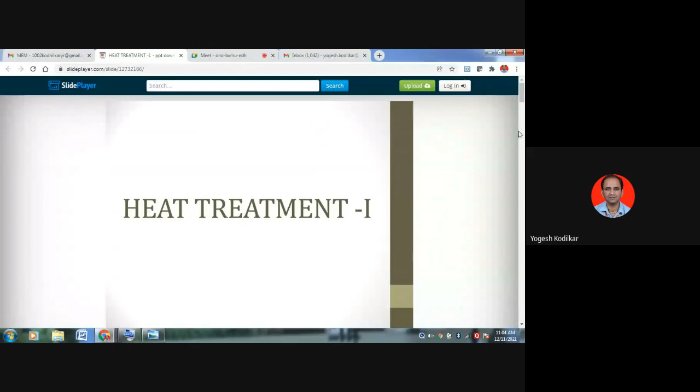Okay, let's briefly see what heat treatment means now. Basically, what does heat treatment do? We are giving heating combined with cooling. So let's see the heat treatment definition first.

Basically it is a 14 marks chapter. In this heat treatment process, we have to study various processes right from the initial ones like annealing, normalizing, then hardening, then tempering, mild tempering, types of tempering.

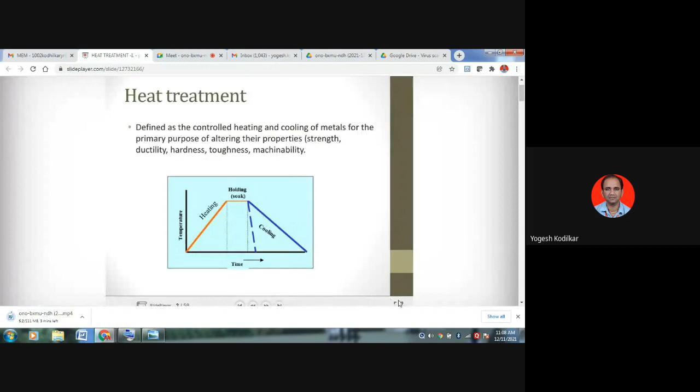So I hope you understood what heat treatment is, students. Heat treatment is basically heating above its recrystallization temperature. After heating, then soaking for a certain time period, holding, and after soaking or holding, then cooling. Cooling means quenching. So in this way, heat treatment is a combination of operations, not just one.

So, roadside blacksmiths used controlled heating and cooling of metal for the primary purpose of altering their properties. What is the primary purpose? To alter its properties - to change it, to enhance it.

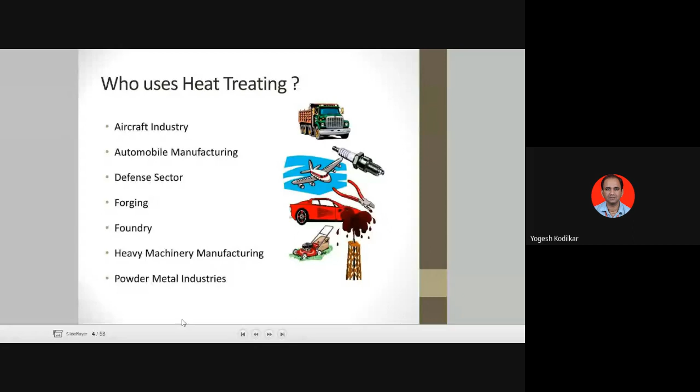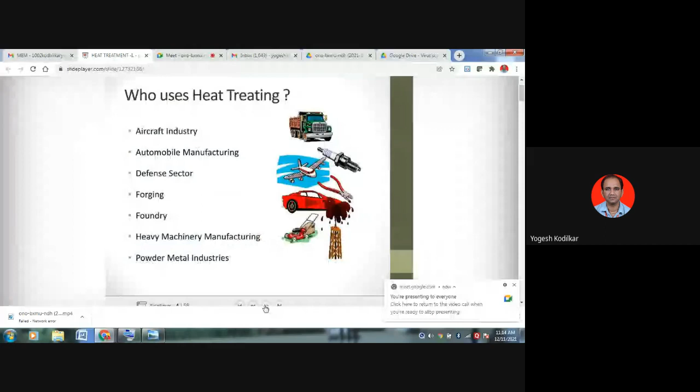In this way, these are the industries: the aircraft industry, automobile industry, defense sector, forging, foundry, heavy machinery manufacturing and powder metal industry use these heat treatment processes. We will move to the next part. So steps in heat treatment operations. What are the steps? These are the different steps in heat treatment operations.

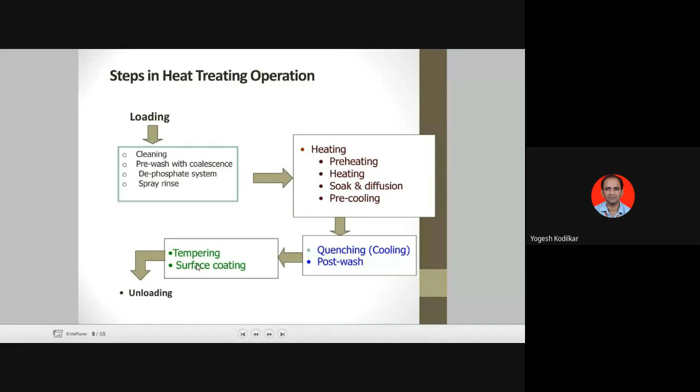So in this way these are the steps: loading, heating, cooling that is quenching, and last is reheating that is tempering. Then we move to the next part. These are the basic steps of heat treatment. There are three basic steps: heating to a specific temperature, then soaking, holding at the temperature for appropriate time depending upon the cross section and depending upon the type of process which you are involved in.

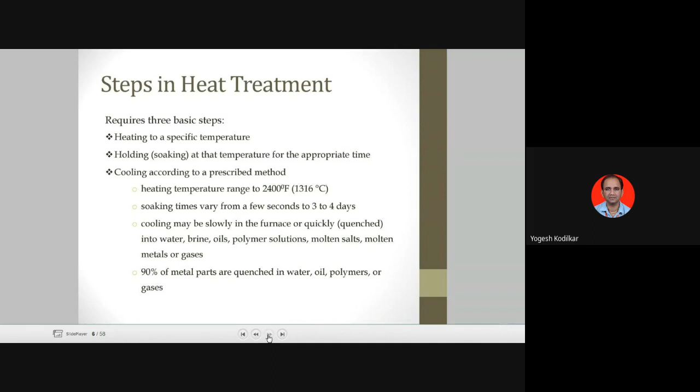Cooling, or either polymer or gas cooling also. So these are the different steps of treatment: heating, soaking, and cooling. So these are the basic three steps of heat treatment processes. Then heat treating processes: annealing, normalizing, hardening, and tempering. So these are the various heat treatment processes we have to learn.

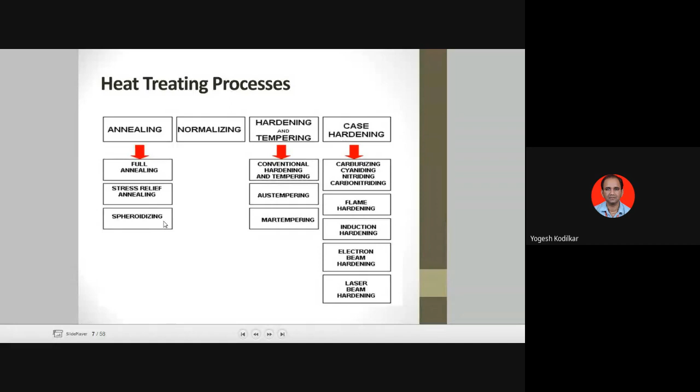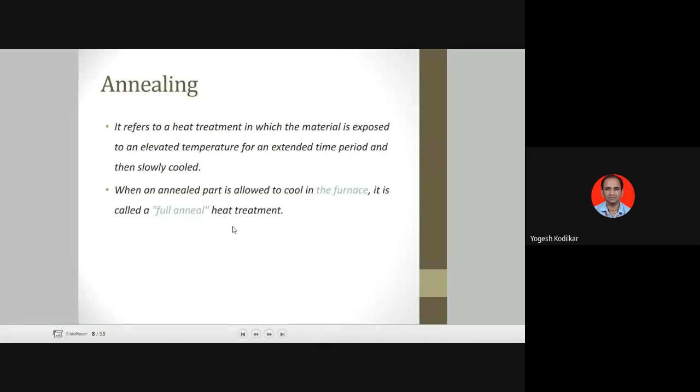It refers to a heat treatment in which the material is exposed to an elevated temperature for an extended time period and then slowly cooled. When an annealed part is cooled in the furnace, it is called full annealing. The furnace is switched off and it cools in the furnace only, that is full annealing. These are the types: full annealing, process annealing, stress relief annealing, recrystallization annealing, spheroidized annealing.

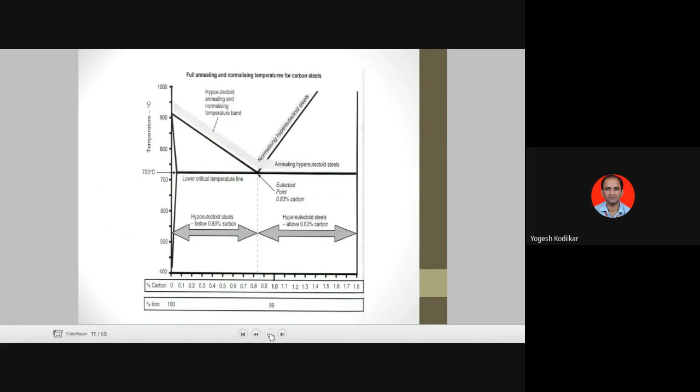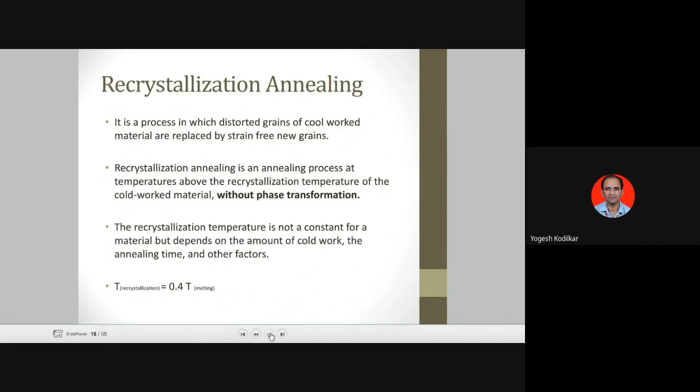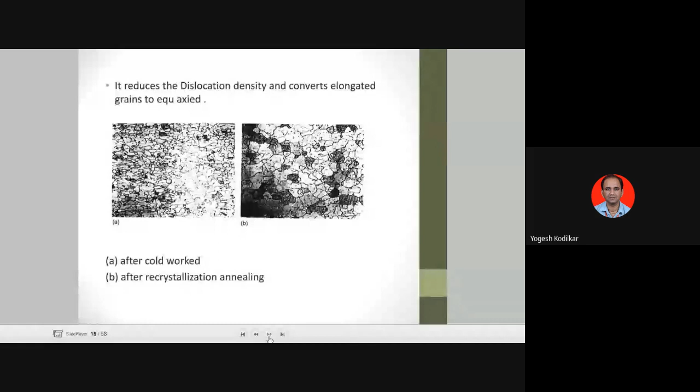In each annealing treatment there are different temperatures and different heating and cooling rates. So naturally it shows different microstructures during different types of annealing. So these are the different annealing treatment processes. And in spheroidizing, a spherical cementite structure is formed. That's what is called spheroidizing. So these are the various treatment processes which you have to learn one by one.

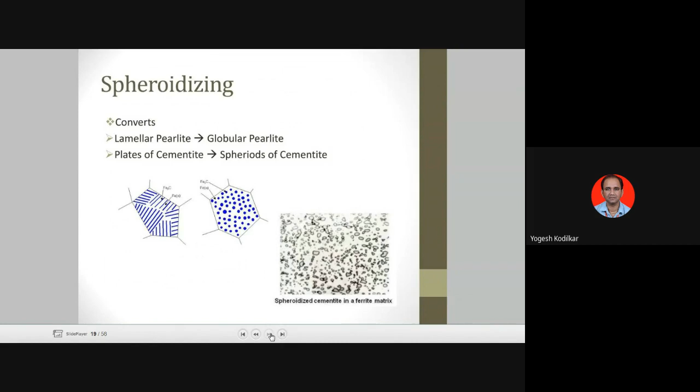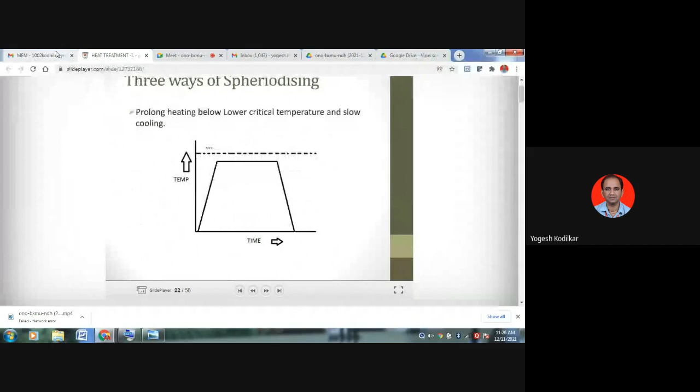So in this way we are studying these treatment processes one by one easily. We have to learn them one by one.